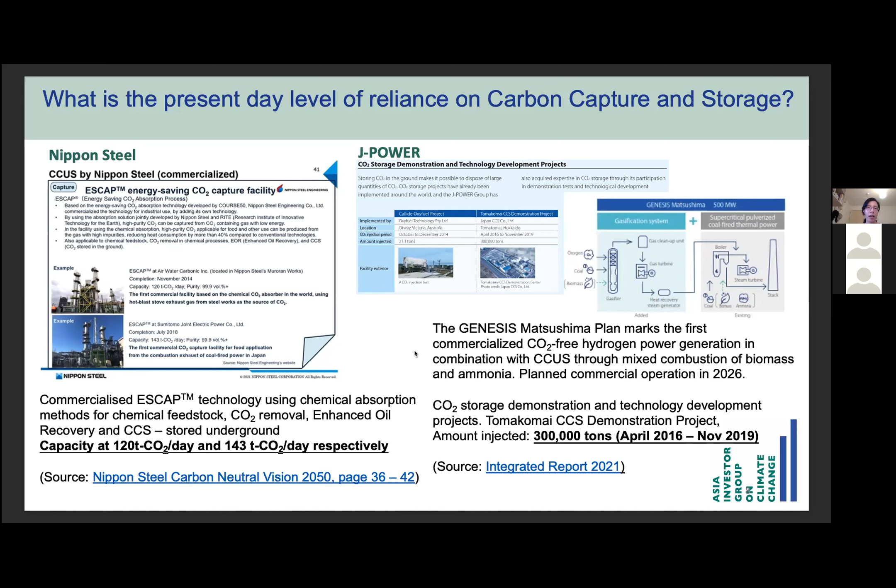We have J-Power. They have also announced that they have commercialized a plan for CO2-free hydrogen power generation combined with CCUS. This is to be commercialized in 2026, and another project has already injected 300,000 tons over a 3+ year time frame. And finally, in Korea, in the next slide, please, we'll see that KEPCO, a utility, is developing a 10 megawatt class CO2 capture pilot plant.

We can also see that CCS is one of the 4 main strategies to support the company's carbon neutrality goals. And the last example that I'm going to cite is POSCO. They also have a process by which carbon will be separated from the byproduct gases in the operations. And the company says in their report that they will consider selling the captured carbon if they find a safe and sufficient storage infrastructure method to run this process.

So I've just very quickly taken everyone on a quick tour around Asian markets for you to see for yourself the CCS projects that are being planned for, some that are to be commercialized. There is a common theme amongst these projects, and that is that they're expecting that CCS will support the company's carbon neutrality goals for companies that have already set such ambitions. And in other cases, we're seeing CCS being referenced as a technology utilized for other purposes as well.

So in the next slide, we'll see the theme for today. We're hoping to have a discussion around what this decade, what we call this decisive decade for decarbonization, looks like. And looking at the power and steel sector, I think, will be helpful because these are the sectors that we're focusing on in the report that we are launching. And it will help us examine the overall role of CCS in the decarbonization pathway.

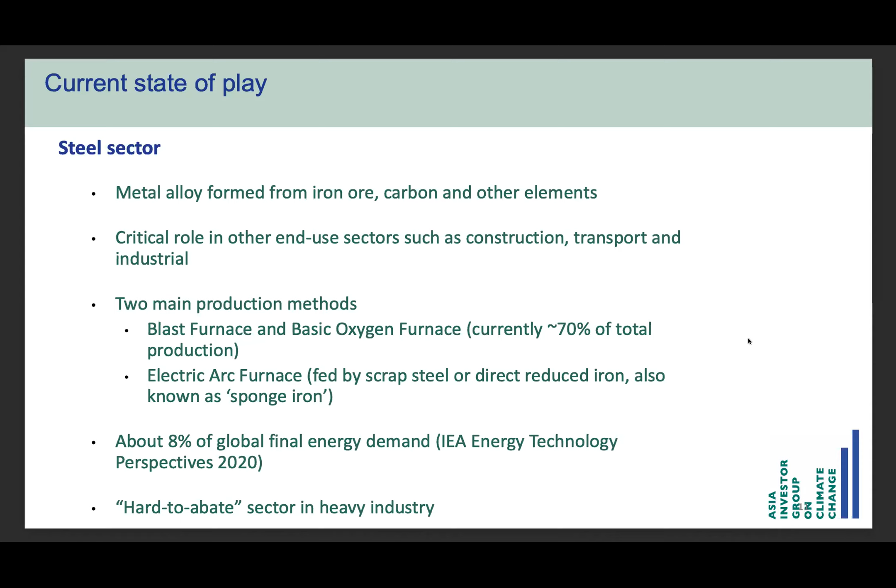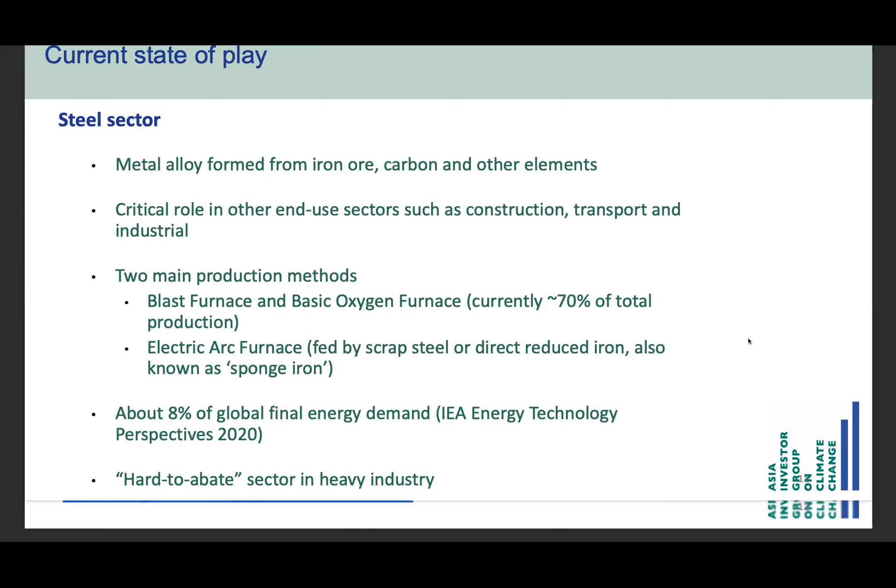So maybe let's look at the next slide. When we think about decarbonizing these two sectors, what exactly is the challenge ahead? And for the purposes of today's forum at China SIF, we thought that it would be helpful for us to look specifically from the lens of China.

So a few statistics that people probably know, but perhaps helpful to reference to set the scene, is that China is highly dependent on coal to generate electricity at the moment. It contributes to 53% of the world's total coal-fired power. So clearly to reduce the country's reliance on coal is a tall task, but it's one that needs to be done.

Having said that, we've known quite recently that decarbonizing the entire sector is a really difficult task. From the steel perspective, we do see that China is, by clear means, the world's largest steel producer. And from an emissions perspective, this sector contributes to 10 to 20% of the country's emissions.

But having said that, we do note that for the steel sector specifically, there are plans for the country to peak emissions coming from the steel sector by 2025, and overall by 2030 for carbon emissions from the steel sector to decrease by 30%.

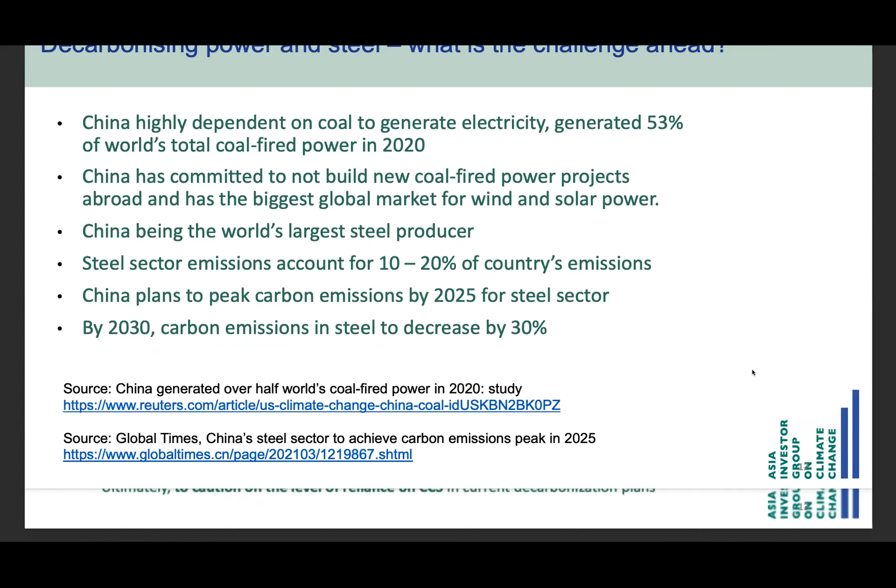And so for that reason, on the next slide, our team has put our heads together. We note that CCS deployment is being implied significantly in many heavy emitting sectors. And we found it necessary for us to look into the feasibility of this assumption that CCS is to be relied upon.

So with this report that we are launching here, we wanted to triangulate and interpret the various reasons that are put out there, whereby the assumptions are for CCS to be deployed as a decarbonization strategy. We do so by examining the cost competitiveness of CCS deployment. And we do want to get investors to ask of companies their approach on CCS, if that's being cited as the main decarbonization solution.

But ultimately, with this report, we do want to caution on the level of reliance on CCS in the current decarbonisation plans. So I'll leave a lot of the detail to the good hands of Wood Mackenzie, who are the consultants we have commissioned to conduct the economics analysis. But before I pass on to them, just a few high-level things that I think we should keep an eye out for. The next slide, please, Fergus.

So key discussions in the report for the power sector, for example, are whether or not there's a case for CCS and what the competing technologies are. We do know, for example, that renewable energy is the most direct way to decarbonize. However, we do acknowledge that they're intermittent by nature.

The question would be whether or not CCS retrofits for this remaining fossil fuel energy are viable. The competing factor, I think, is the cost competitiveness of renewable energy, and also very importantly, the battery storage costs, the development of long duration batteries, where that technology is up to by that time. So we'll hear more about that.

For the steel sector, as mentioned, it's a hard to abate sector. We can't expect blast furnaces to be fully substituted by existing options overnight. Then we're seeing a very clear trend that hydrogen options are also emerging, and they will at some point commercialize. And so potentially CCS could play a role as an interim solution in the decarbonization pathway.

So the competing factor would be the speed at which hydrogen emerges as the zero carbon feedstock. It's significantly important because it implies that there are some fundamental changes to the overall steelmaking process. But ultimately, to truly decarbonize the process, we do need to see the use of green hydrogen as well, meaning that hydrogen is being powered by renewable energy sources. So that's one big factor that's in the cards.

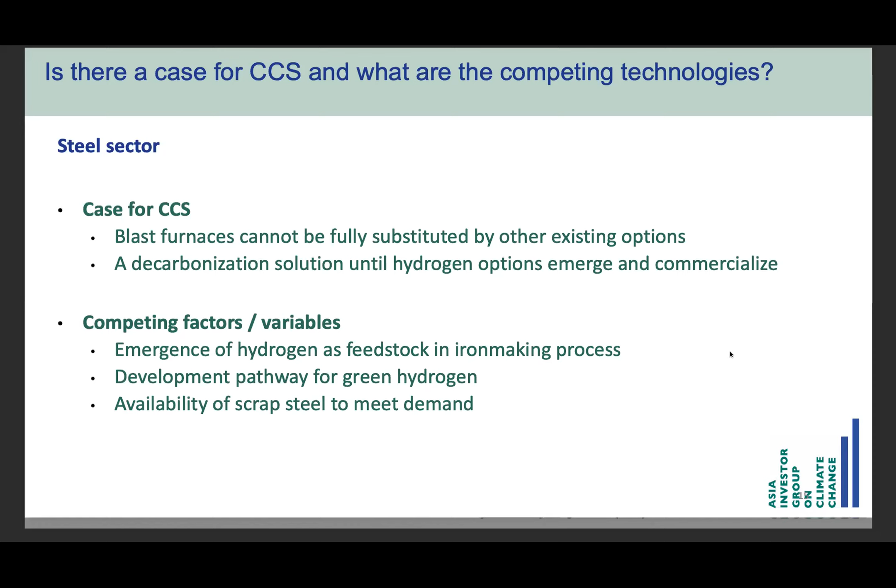Another competing factor would be the availability of scrap steel. However, we do know that steel is already the most recycled material in the world, so it's an ongoing process. Now, in other parts of the report, we do go into a few case studies and some detail into challenges that we see with the deployment of CCS.

So just very quickly going through some of these would be the environmental risks. We talked about the potential for leakage, whether it's abrupt or gradual. The leakage could potentially be a hazard to human health if it's released in high concentration, or if it gains access underground to terrestrial or marine ecosystems. There could also be relevant contamination or damages.

The injection of large volumes of CO2, if not done in suitable locations, could potentially have the result of inducing seismicity as well. Another issue not to overlook is the potential for water stress, because most of the CCS operations that we see use absorption technologies. So that means it will be a very water-intensive process as well. So potentially there could be high cost ramifications, and these are things that we do need to keep in our line of sight.

The technology perspective of it has also proven to be challenging. We have one case study in the report where we look into Chevron's LNG carbon capture project, initially the largest commercial CCS project, but it was delayed by 3 years and then cited challenges in meeting its designated capacity in capturing carbon. So that's also one case study to look into.

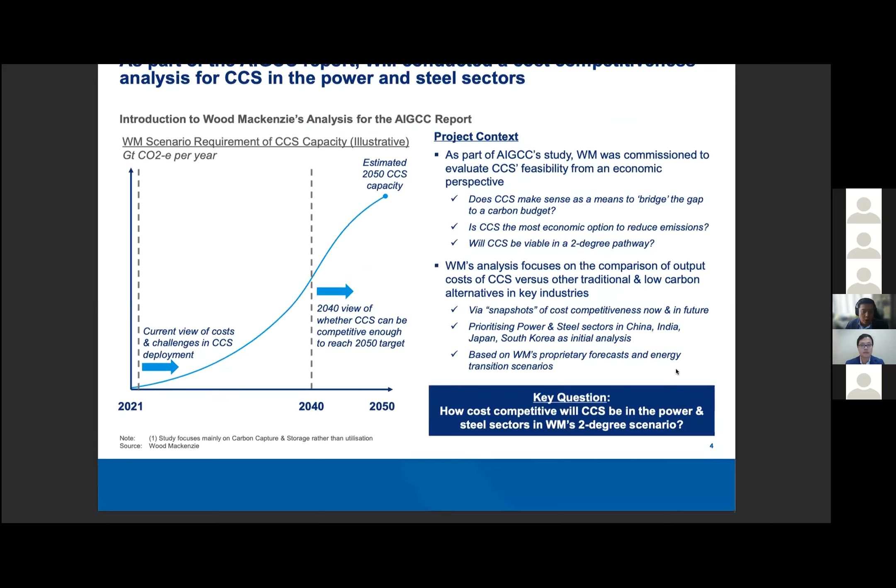So good afternoon, everyone. So for the next 2 sections, both on the power industry and on the steel sector, what I'd like to do in each of the segments is to first go over some of the common trends and observations that we have made that are applicable to all 4 of the markets which we have analyzed. And from there, try to help illustrate to you a different perspective into how one should look at CCS.

For the power sector, I think it would not come as a surprise to anybody that renewables is already highly competitive and will become the most competitive option on an LCOE, or levelized cost of energy basis, across all 4 markets in the near future. And that advantage will only widen in all markets. However, it's not just about cost, right? Cost is only one critical element, but not the only factor at play.

Renewables, as Valerie mentioned previously, is intermittent. And as such, there is a need for a dependable source of power generation in order to provide electricity when the sun is not shining or the wind is not blowing. And in that regard, gas and coal will continue to fulfill that critical role going into the future. And by extension, that also applies to CCUS. So the role of CCUS is not really to compete directly with renewables, but rather to fulfill the role of providing dependable capacity.

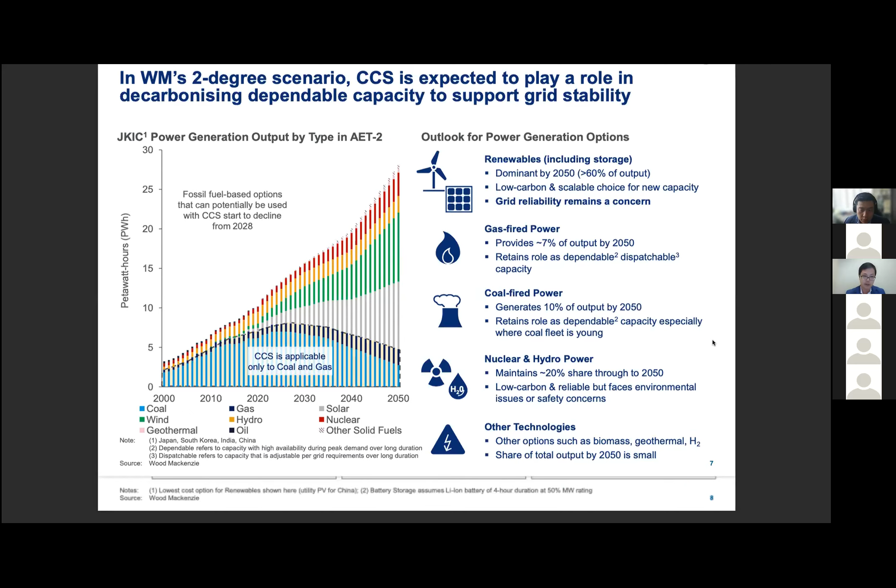Right. So let's look at what are some of the options at play here. As mentioned, blast furnaces remain the dominant form of steel production at present, accounting for over 80% in the Japan, Korea, India, and China markets. Most of this would be deployed in China and India, whereas in Japan and Korea, they're mostly already using scrap. What can we observe here through our projection, again, in a 2-degree pathway?

First is that the blast furnace application will decrease in terms of market share quite significantly, down to around 25% in 2050. A lot of this is driven by preference for lower emitting options such as scrap, taking more market share. But ultimately, even in 2050, blast furnaces remain relevant because they are pretty much the only scalable option for you to convert low-grade iron ore into steel, and also in places where there's limited feedstock options.

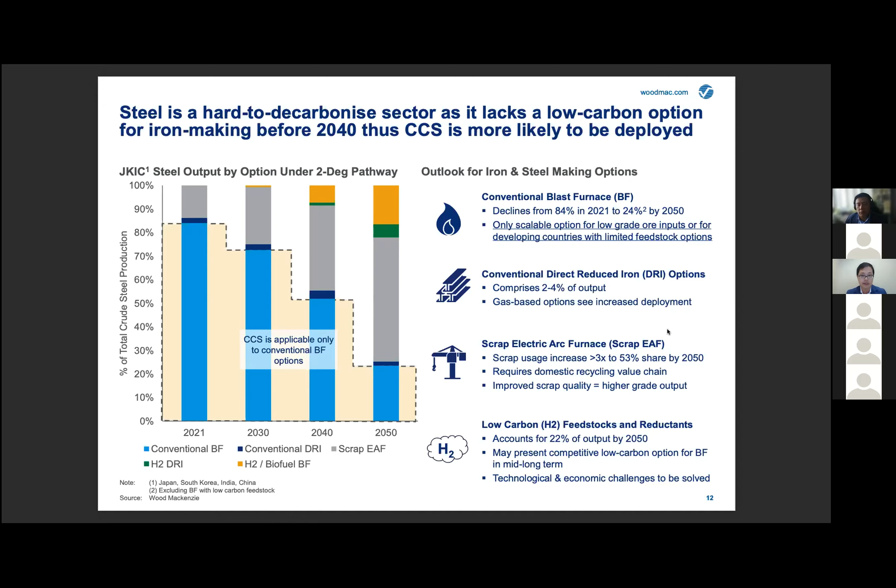The second point I want to highlight here is around scrap, where you see in the gray, it grows from a proportion of around 15% to almost tripling to over half the capacity by 2050. It is certainly a low carbon option, but there's a fundamental characteristic here in that it relies on the recycling of scrap, and to that extent the availability and the quality of scrap then dictates how much scrap EAF applications can be deployed.

The third main point here is around hydrogen. As mentioned, hydrogen is a big wild card here. In our 2-degree pathway, we see it only becoming commercial sometime in the mid to late 2030s, and therefore the deployments of hydrogen-based feedstock will then only come into play in 2040 and 2050, but growing quite quickly, and substituting a lot of the conventional blast furnace options. Next slide, please.

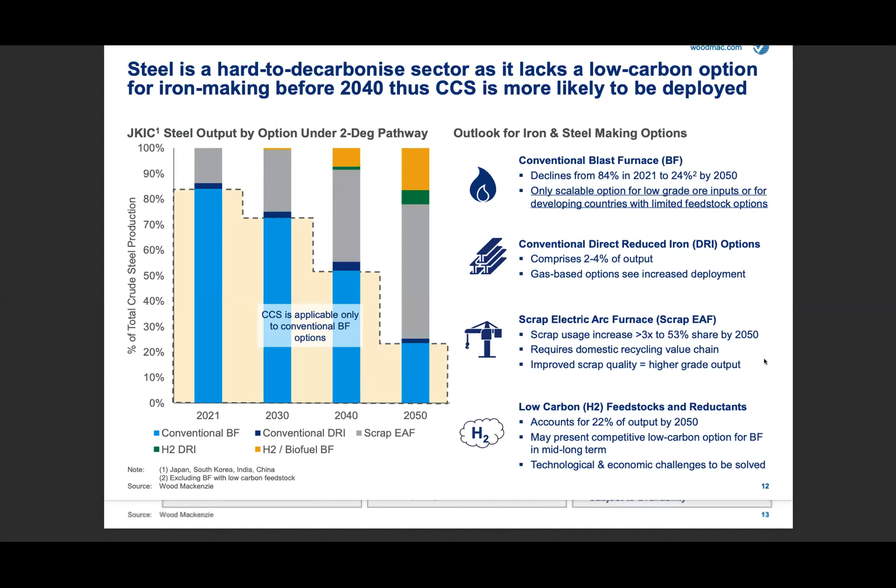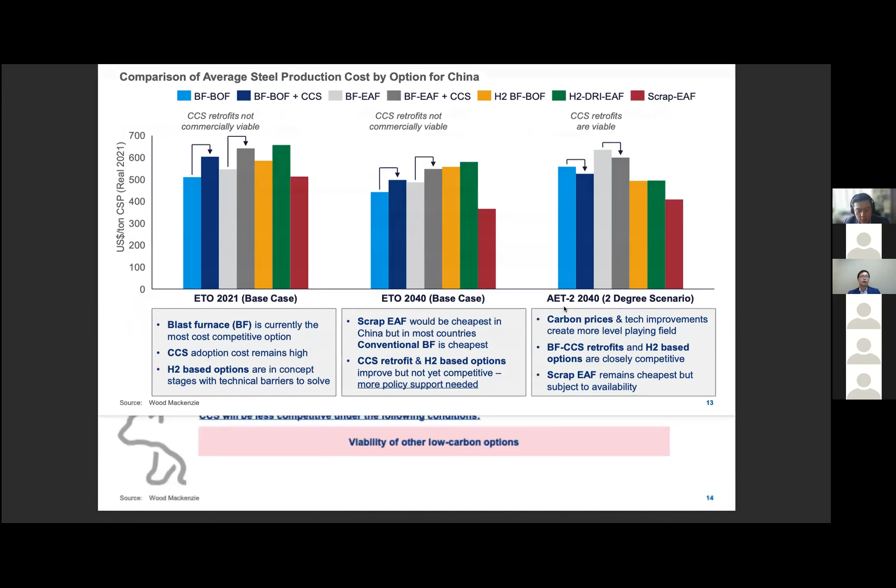So once again, if we want to take a look at CCS in the steel sector, what are the key factors that we want to take a look at? Well, similarly to power, a lot of it is policy, not just carbon price in the case of steel, but also the implementation of carbon border adjustments.

Much of the steel production is exported globally, and without the corresponding measures in place, there is a risk of carbon leakage, where producers can relocate high emissions industries such as blast furnaces to countries which do not have the carbon policies in place. So it requires, I guess, an additional layer of policy support in order to push forward CCUS.

I've already touched on points such as subsidies and great CCUS cost improvements, so I won't go into them further. One other point to highlight here is around the applicability of green steel premium to CCUS. Right now, it's important to highlight CCUS does not capture all of the CO2 coming from steel, from the blast furnace application. There's still a significant, potentially up to 50% of the carbon dioxide that doesn't get captured, depending on how the plant is designed.

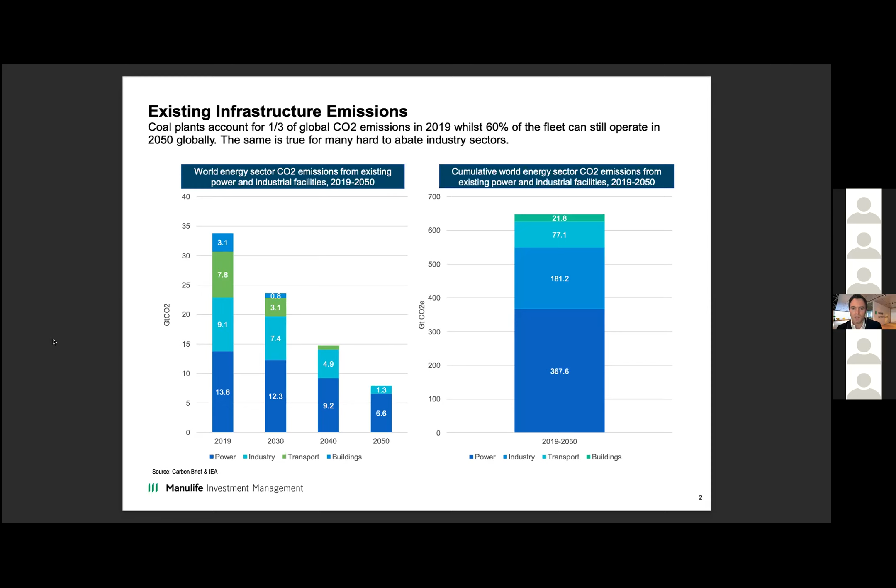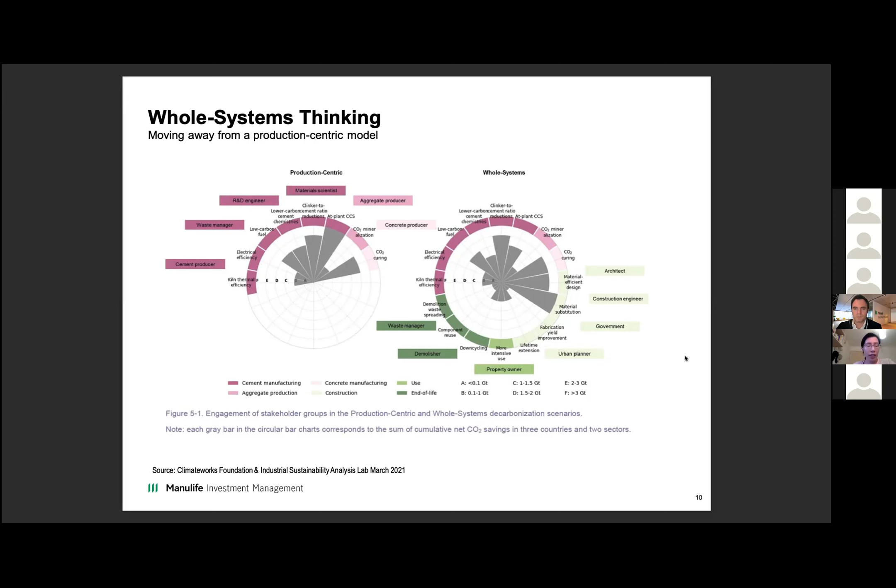Hi, Eric. Thank you so much for that presentation. It's definitely helpful to have that additional perspective. I don't think we have any questions in the Q&A, but certainly what you've looked at, not only from the cement perspective, but also more broadly from the systems perspective, is an important point to ponder on as we engage with companies. So thank you very much for that additional input.

So in the interest of time, I might just move on to the next session with Seiji Kawazoe, who is the Senior Stewardship Officer at Sumitomo Mitsui Trust Asset Management. He has very strong global experience across multiple markets as a global equities portfolio manager, and is responsible for building ESG capacity in the firm, which now has assets under management of over 750 billion US dollars. Seiji is also responsible for stewardship oversight of global institutional investment assets such as public funds and private pension funds. Also, he is a steering committee member at Climate Action 100+, a committee member of the PRI Investor Policy Dialogue on Deforestation, and a member of the investor group of the 30% Club in Japan.

So, an investor wearing numerous caps, involved in many initiatives as well. So thank you for your time today, Seiji. Yeah.

So I'll end off with how investors should be responding to these kinds of uncertainties, not only with regards to policy, but also current investment decisions. And that will be on the next slide. We believe that scenario analysis is a good tool for not only investors, but also companies to assess the impact of the financial risk stemming from climate change that could really help inform strategic planning.

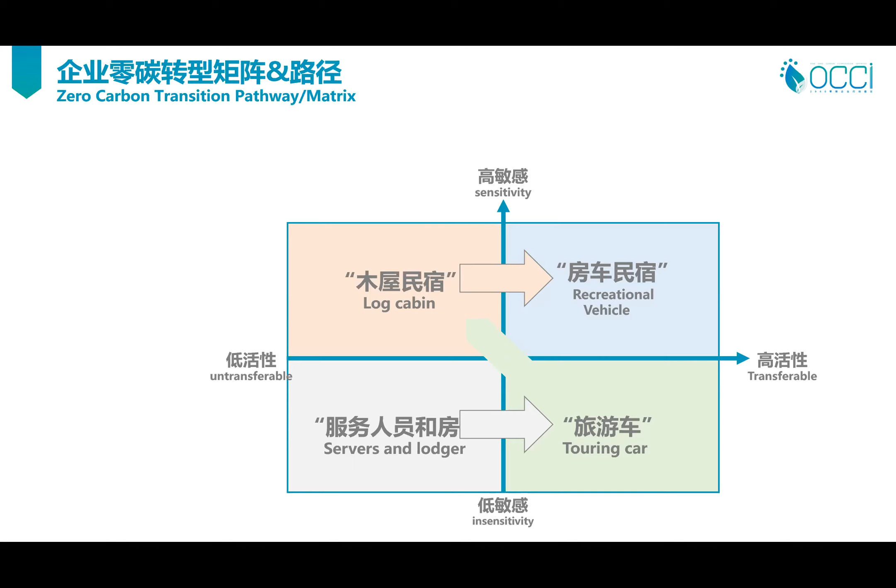If a company only has fixed assets, and the fixed assets are high carbon, then just like the log cabin, they cannot move, they cannot shift. Then they need to make mergers and acquisitions, and they need to introduce partners. For example, they can work with the recreational vehicles to change their technology pathways to make sure they have a way to adapt to low carbon.

If we take the steel industry as an example, China's steel production accounts for around 50% of the total steel output in the world. And in China, 90% of steel production uses blast furnaces. The steel sector also has scraps, and they are not very sensitive to carbon neutrality policies, but they can use CCS rather than relying on EOR. They can turn those materials into construction materials.

And also some SOE steel companies are developing green hydrogen. They can also work with thermal plants or oil and gas companies, chemical companies to develop CCS technology. And the steel companies can also work with cement plants. Cement plants are currently developing concrete curing technologies to deal with the carbon produced. So in the process of making the zero carbon transition, not all the blast furnace assets would have to be abandoned to shift to other technologies.

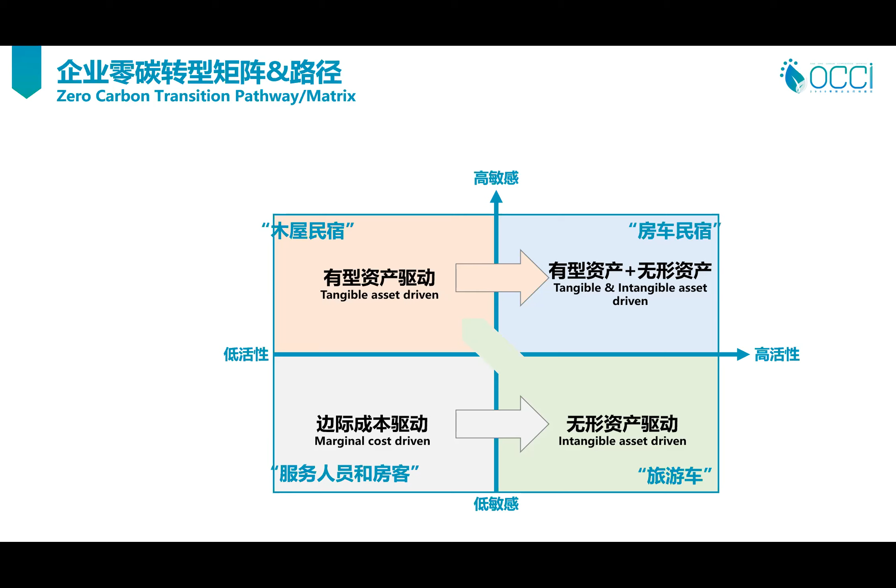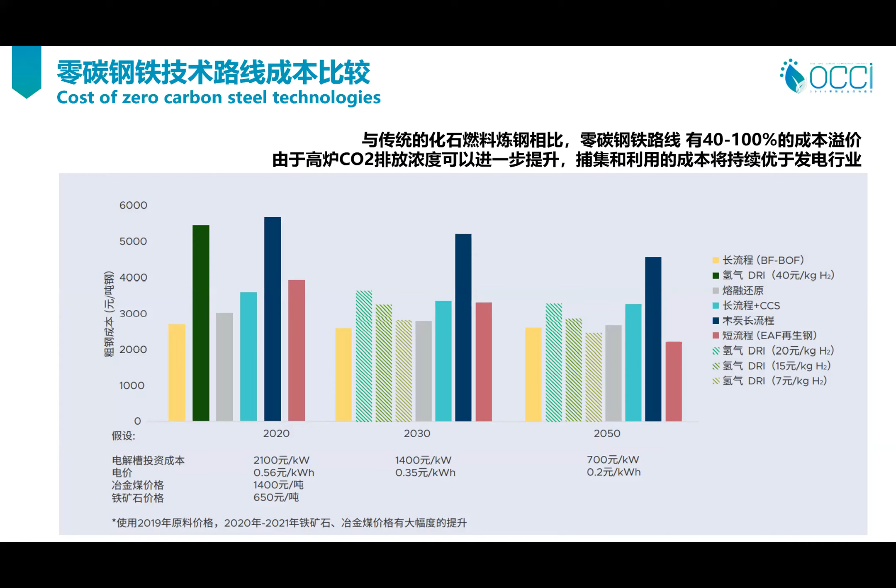So here is a report that shows that when the cost of hydrogen is not very low, it predicts the efficiency and the competitiveness of hydrogen plus CCS. So it is quite competitive. By the end of November, a company published its net zero transition pathway. And we can see here that it also contains the process of the blast furnace. So it applies the model of CCS plus hydrogen-rich carbon cycle blast furnace. So it avoided stranded assets of blast furnaces worth nearly 1 trillion RMB. So it realizes zero carbon steelmaking. We can see that it is relatively competitive.

Apart from blast furnaces, there are also other net zero steelmaking technologies. Overall, we can see a lot of Chinese companies are trying to apply different technologies plus CCS. And I'd like to project as well that CCS may not be very widely used in all industries. In other words, not all companies may use CCS to realize net zero because the cost of CCS still faces competition from renewables. However, for steel, power, and cement industries, there is potential to have CCS retrofit. So as we can see in the matrix just now, some companies may avoid stranded assets. And in this wave of net zero transition, they may successfully increase the value.

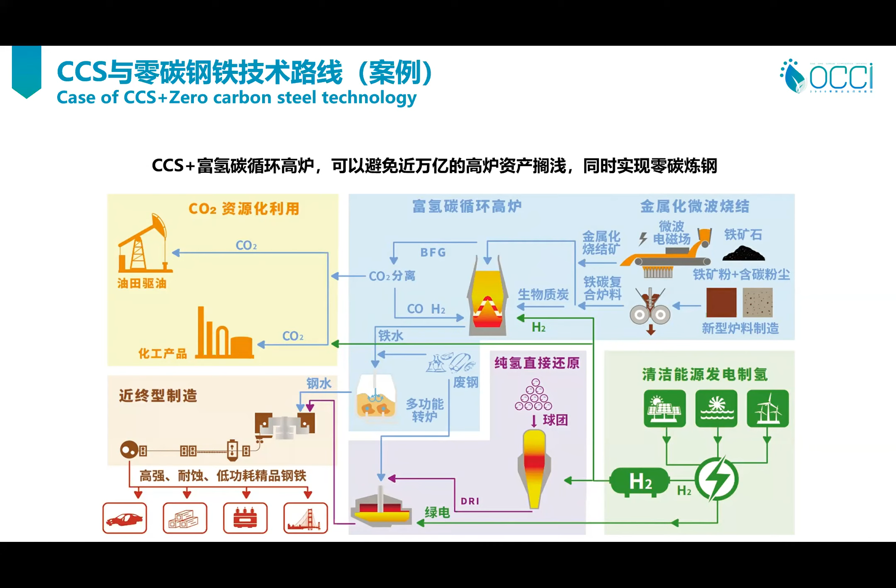So from the perspective of companies, they need to think about how to tap the potential of these different technologies so as to outperform their competitors. Now, compared with chemical industries and steel industries, for thermal industries, there may not be very high potential. They can only capture CO2. But other conditions are quite limited. So they cannot capture or store CO2 at a very low cost. So compared with steel or cement industries, the coal-powered industries may not widely apply CCS. They may still use CCS, but as a complementary method. So I think this is my projection.

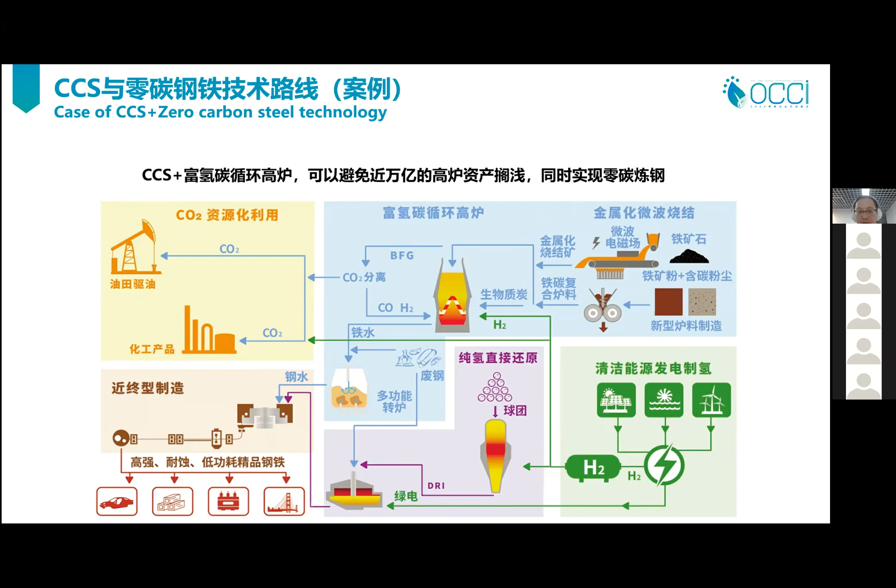I think a minority of companies in the thermal power industry may heavily use CCS. That's all for my input. Thank you. Oh, by the way, this is the net zero pathway by the company that I just talked about. As you can see, ultimately, they want to reduce 30% to 50% carbon by the hydrogen-rich carbon-recycling blast furnace.

Thank you very much. Thank you very much, Cao Dong. I'm sorry for rushing you on there, but we do have a very limited time. And finally, we do have Dan Gardner from AIGCC, Climate Transition Specialist with a background as a sell-side equity analyst at numerous firms, including Deutsche Bank and RHA. So Dan, thank you so much. Sorry we've overrun there, so maybe we will only be able to have a few quick exchanges.

So maybe can you give us a quick overview of the general sentiment in Europe for the technology CCS? How is this currently positioned amongst European companies, and other comments that you're able to make from that perspective?

Thank you. Thank you, Valerie. Can I just check you can hear me okay? Yeah, perfect. Okay. Oh, thank you. Thank you for the invite, and it's great to see some excellent content and interesting slides to pick up on that you've presented, and you've invited me to present a European or global perspective on some of these issues. I wanted to flag that.